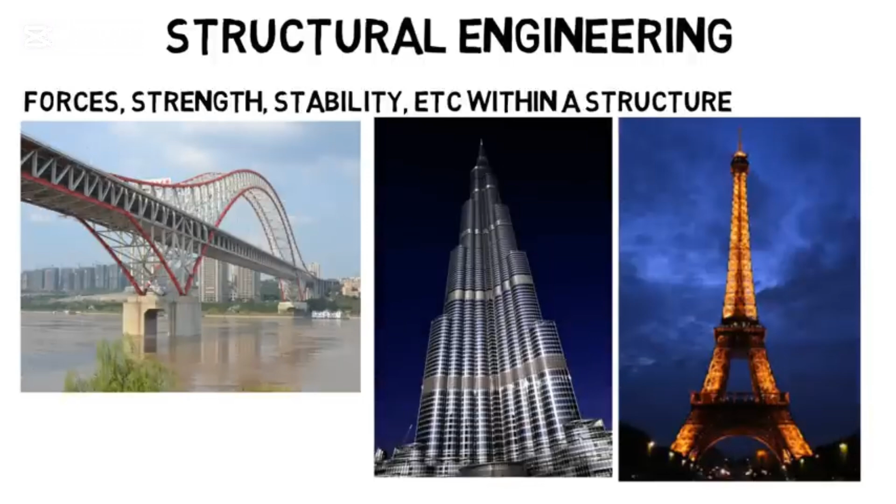So first, structural engineering is about calculating and understanding the forces, strength, stability, and so on within a structure. It could be a bridge, a skyscraper, a landmark, or even a spacecraft or aircraft. Remember, these structures are very heavy and need to support their own weight so that they don't collapse. Now this subfield is the most math intensive and has lots of physics.

All civil engineers will take a class called statics, which is all about the forces and systems that are not moving. In basic physics, you may have done a statics problem, like where does this support have to be for the system to be totally balanced and therefore not moving. You summed all the forces which equaled 0 and all the torques which equaled 0. And that's the basics of statics.

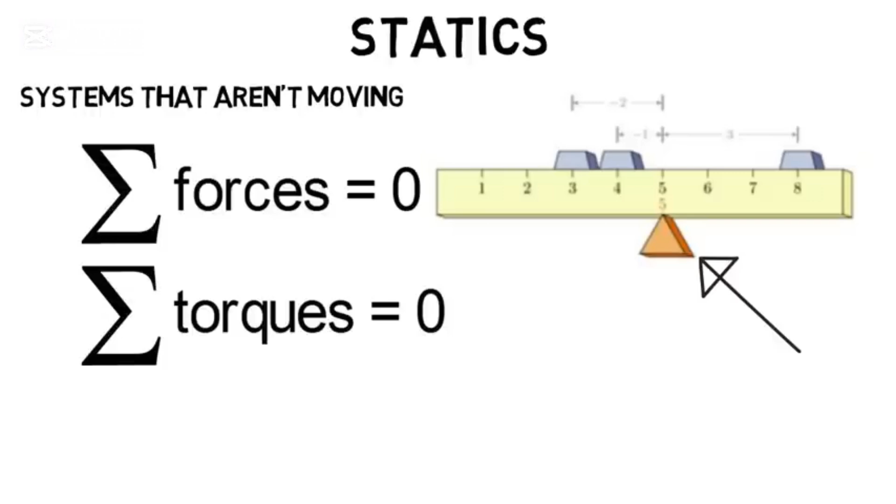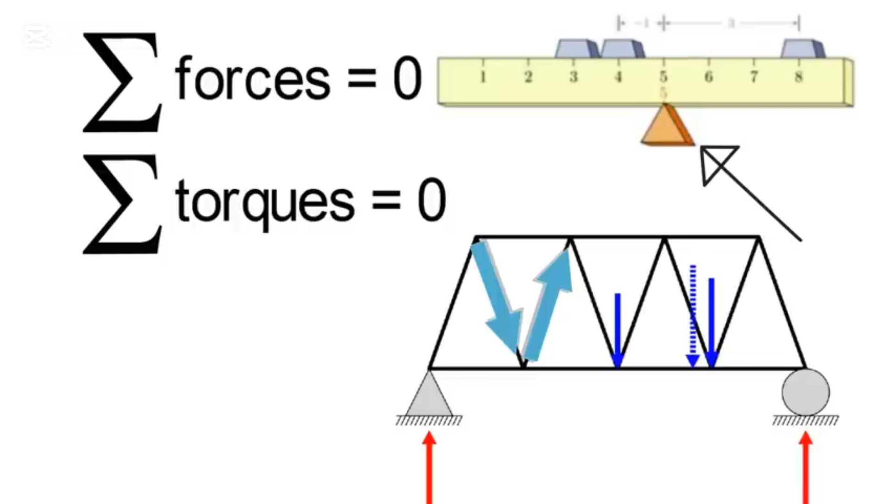So if you're looking at the forces within a bridge or truss, well, the same principles apply, but now there's just more to it. The weight is straight down as shown in blue, all the beams exert forces on one another, but the sum of them is equal to 0, and the torque sums to 0 as well, because the bridge is not moving. And it's of course even more complicated than this, but if you enjoy that kind of basic physics you see above, then you'll likely enjoy the statics and physics you see in structural engineering. So that's just a very simplified explanation, but now let's dive into some of the classes they would take.

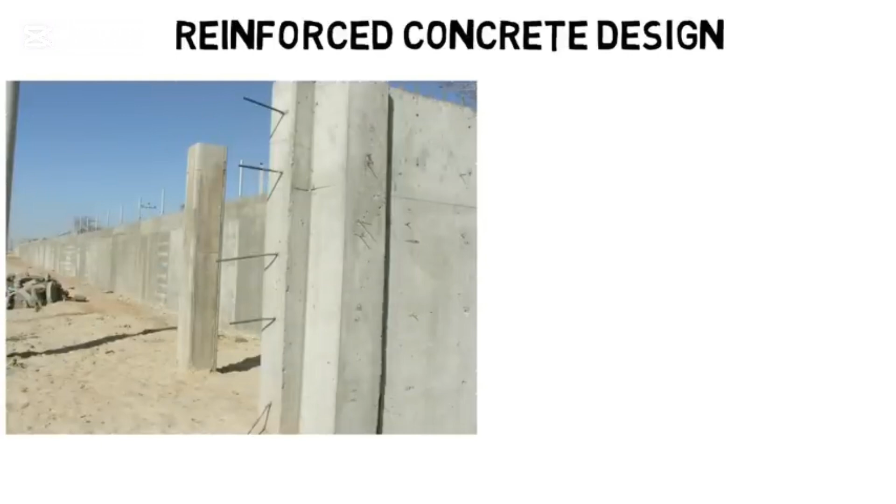One class that would be important for structural students is a reinforced concrete class. In concrete structures, they reinforce it by putting steel beams in the concrete. We can't see those beams, but here, before construction is done, you can see them sticking out. Or you can see a lot of them on these unfinished columns. So why do they do this? Why isn't concrete good enough?

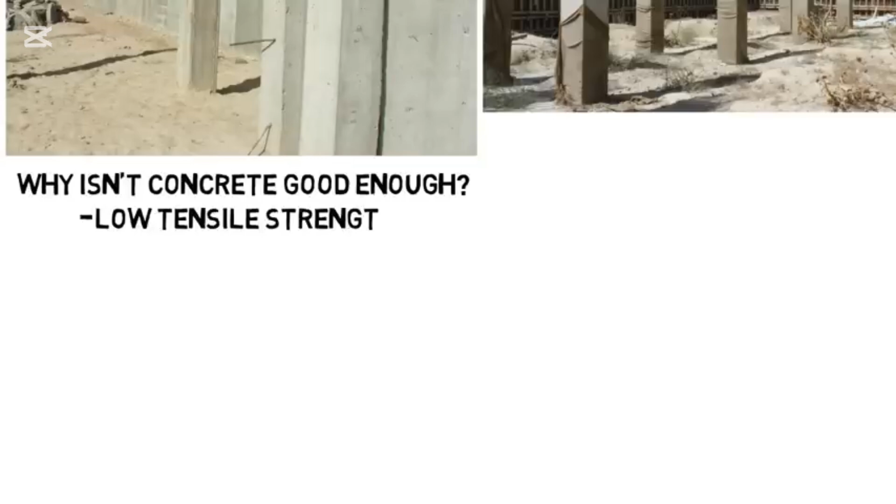Well, concrete alone, once hardened, has low tensile strength, as in it does not handle being pulled very well. However, it's okay with being compressed. But to counteract that low tensile strength, they add steel beams and pour wet concrete, which hardens around them, and then those steel beams have high tensile strength to counteract those types of forces on the structure.

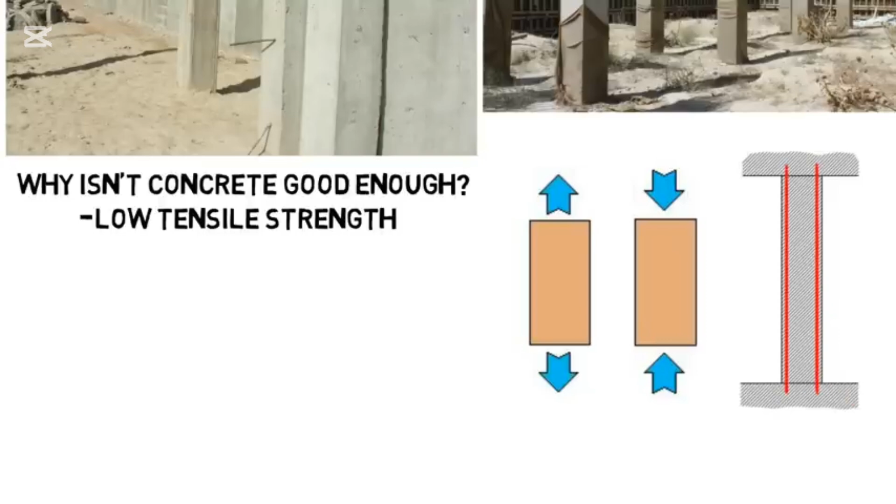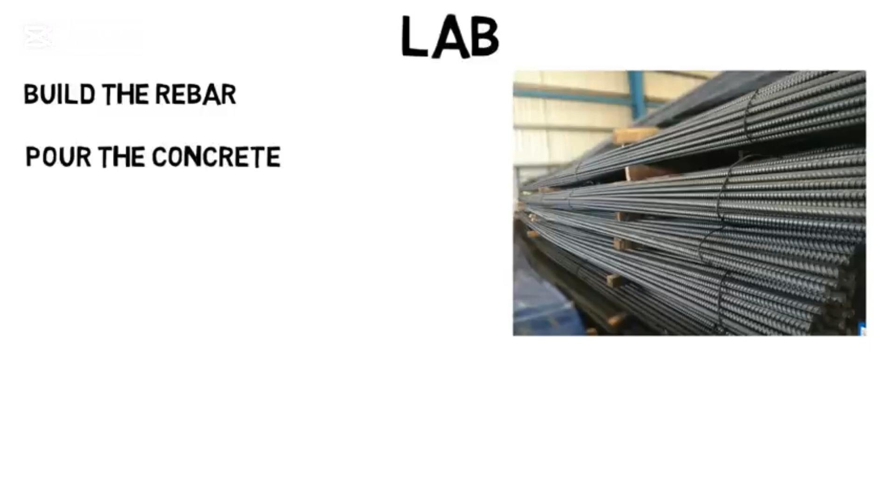So in a lab for this class, you might build the rebar, or the steel reinforcing rods, pour the wet concrete onto them, then once it dries, use a machine that holds the beam on both sides, then apply forces in the middle and keep increasing the force until the beam breaks or cracks and starts falling apart. That force being applied is sent to a computer that tells us the loading on the beam so we can collect the data and get the properties that we need.

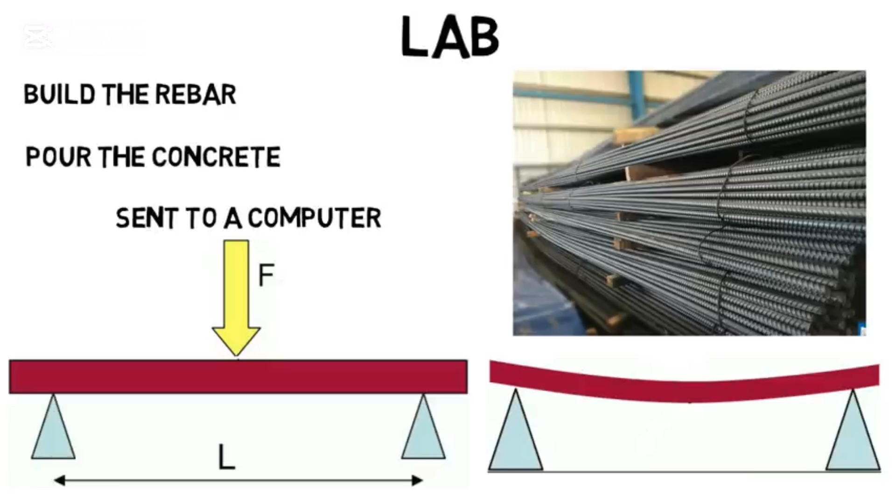You could take structural dynamics as an elective class. Dynamics is about moving systems, unlike statics. So this is one of the few classes where motion is included. So whether it's wind or an earthquake that shakes a building, you need to know how that motion will impact the structure itself and all the forces within it. I've shown this animation before, but mostly for mechanical engineers as it's a vibrating system that they can analyze, but civil engineers can get into this as well. They have to make sure their designs can stand up against any type of movement the structure may be subject to.

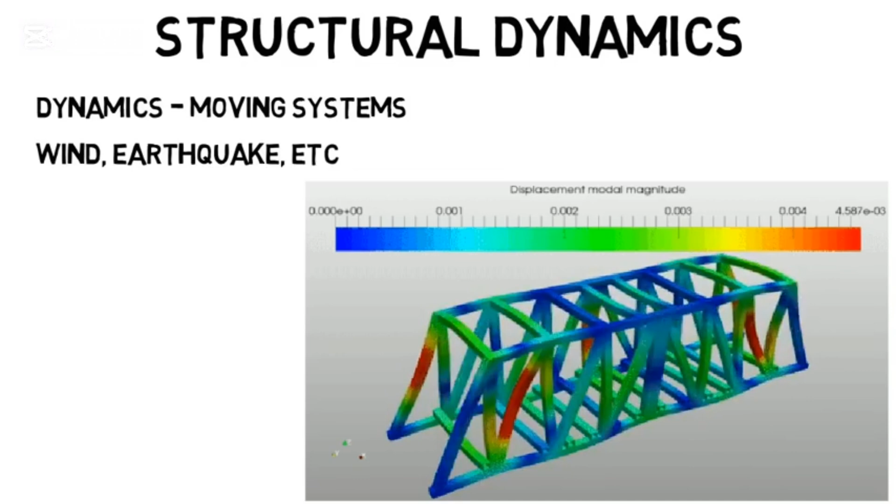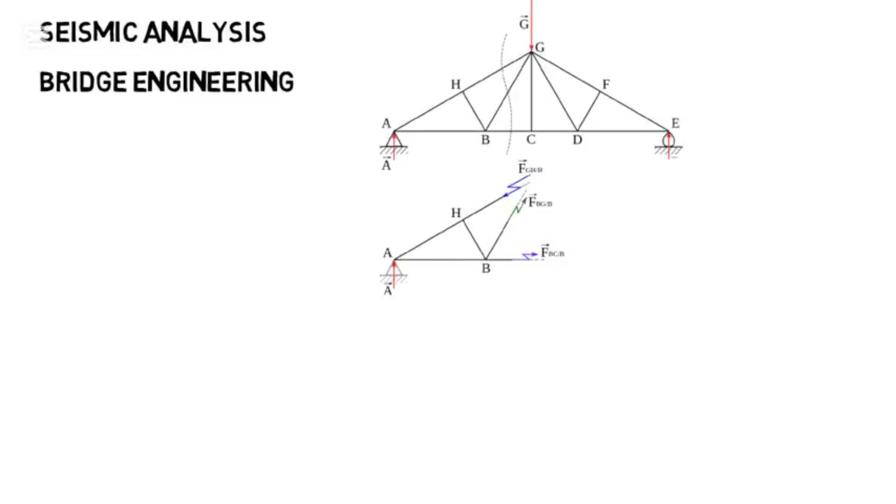You could take an elective class on seismic analysis, which is specifically about calculating the responses of a structure to an earthquake. Or one on bridge engineering, which would be a class on highway bridges, materials used, distribution of loads, and how forces are spread throughout the structure, and so on. Mechanics of materials, like how twisting and bending a beam or column causes it to become internally stressed. Timber structure design, which is about analyzing properties and forces within wooden structures, and much more.

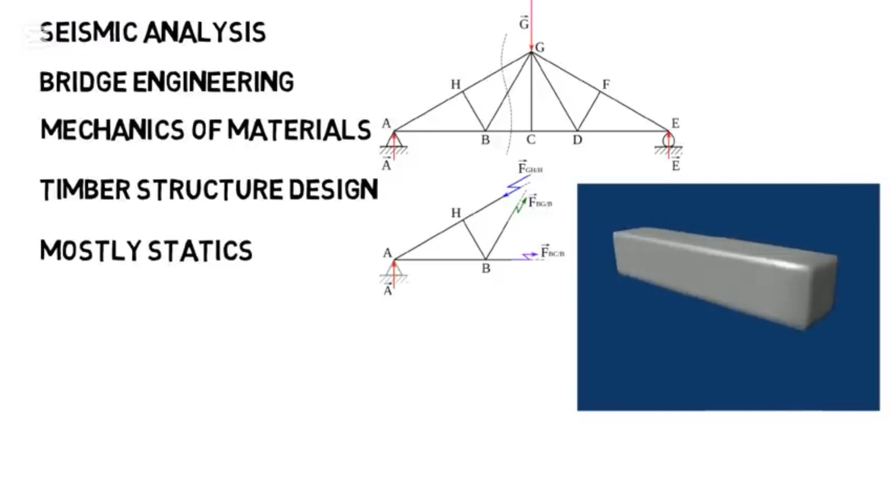See how even if you choose structural engineering, you could still take many different classes from the other structure students? It's a very broad major, but hopefully you really get the idea by now. Lots of physics in this discipline, but mostly statics or forces in structures without movement. In the real world, these engineers often work on the computer and use software for their designs, where that software does that advanced math to determine the forces throughout the structure, like you see here with an office block and its components.

You may still have to do hand calculations, but most of the rigorous analysis you learned in school will be left to the software.

Now let's move on to geotechnical engineering, and you'll already see how different these disciplines are. Geotechnical engineers are concerned with the behavior of earth materials like rock and soil, but the main focus is soil. This may seem odd, but you'll see how important this is.

The structural engineer can do everything right to make sure the building will stand up, but if the geotechnical engineer messes up and you put a structure on soil that can't withstand it or is uneven, the building could fall, sink into the ground, or even lean to one side, probably the most famous being the Leaning Tower of Pisa, which was a result of soil issues.

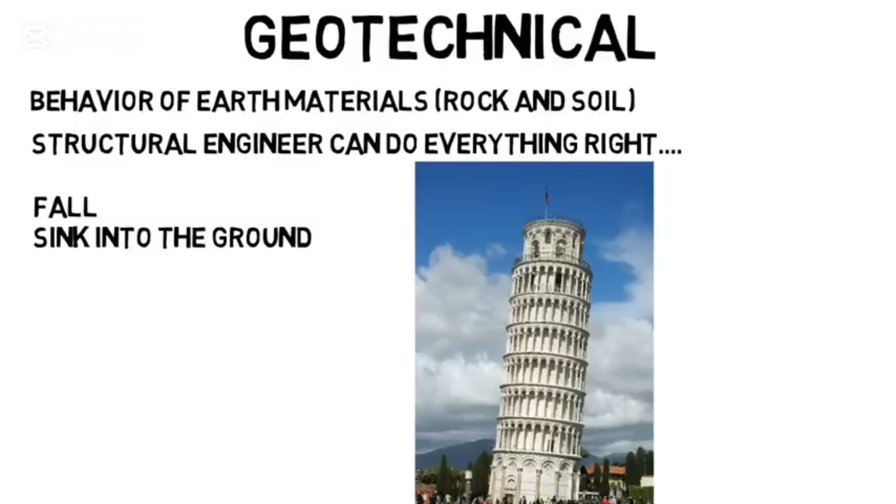Then they also have to consider the foundation of the structures that are being designed, like should they have a shallow foundation or a deep foundation. You may not realize it, but our houses and all the buildings you see have foundations that go underneath the earth to keep the structure as stable as possible by transferring the weight from the structure to the earth.

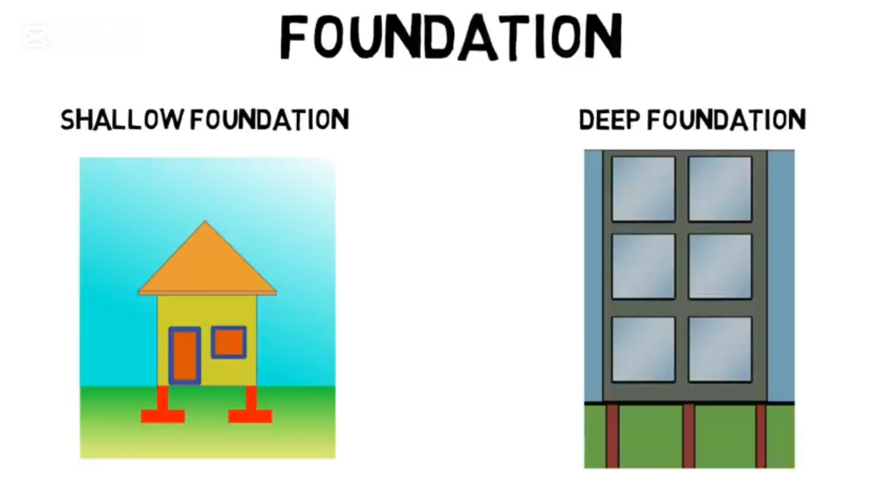But geotechnical engineers rely heavily on testing. So a lab you might see in college is to go out as a class and collect soil samples around your university and bring them to lab. You would have to classify it, like is it sand, gravel, clay, etc. There are many soil types, and you may have to look at the grain size or how it reacts to water.

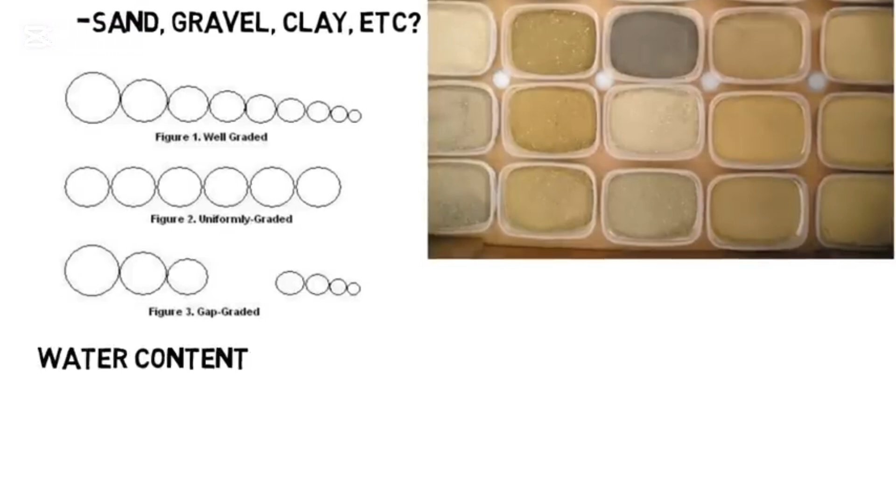You determine its water content by analyzing the sample, which will be comprised of solid soil, water, and air of different masses and volumes. But most importantly, you'll measure how the soil will react to mechanical loading or to different forces acting on it. So you might perform a triaxial test, for example.

Too complicated to explain for this video, but essentially you put the soil in an enclosed area and apply a force or load to the top, which pushes down on the soil. Then pressure sensors measure the pressure at different points to see how the soil is being affected.

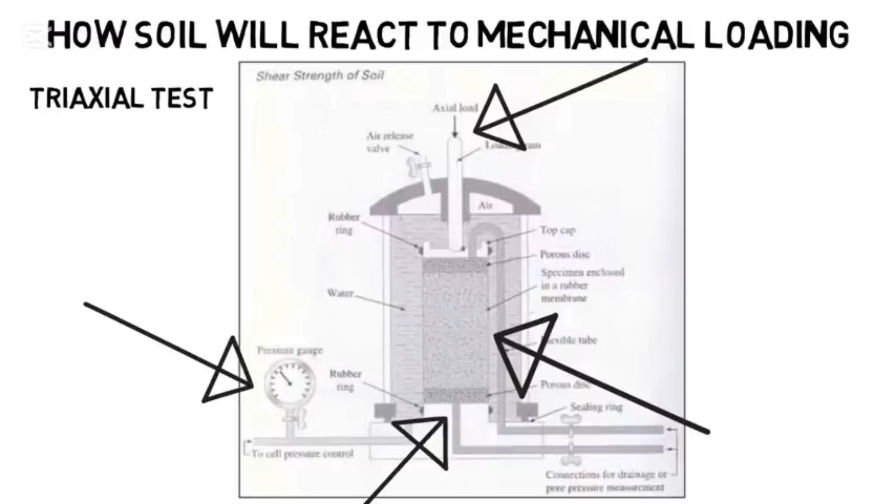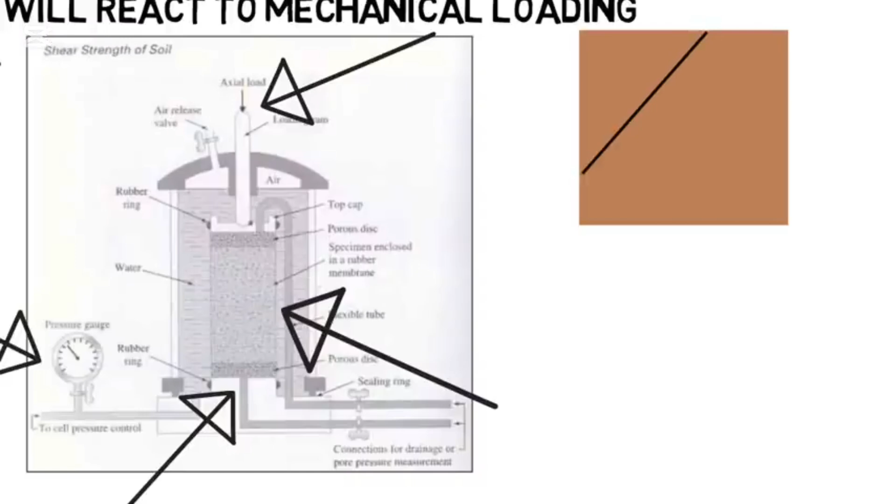If you imagine a square sample of soil and you add a force to the top, the soil can fail along some weak plane. Basically, the weight overpowers the friction holding the soil particles together, and the soil will start to slide, which is known as shear failure. Its ability to stand up to this is known as shear strength, which is one thing that the triaxial test on the left tests for.

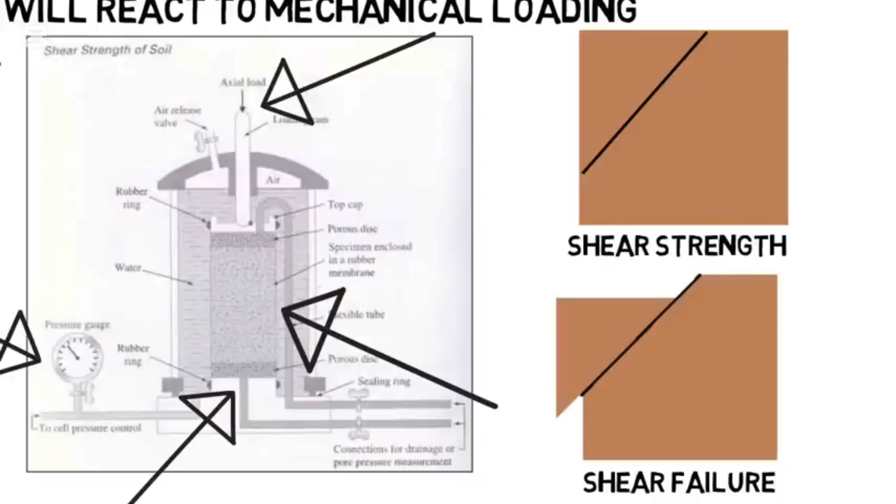And this leads us to what a career in geotechnical engineering could be like. You might be the person who goes out to the field where a structure is going to be built and collects soil samples all around the area for testing. Or you could do testing at the field.

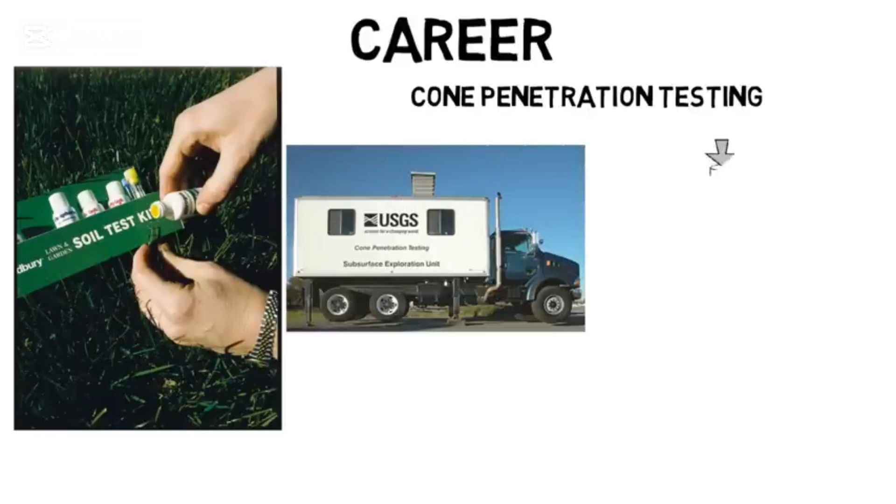One of the most used tests right now in this field is cone penetration testing, where a large truck goes out to the field which has all this equipment on it, and a cone is pushed into the soil, and the pressure will be monitored by a computer on the truck as it moves through the soil into the earth. Based on the pressure, you can analyze the soil mechanical properties.

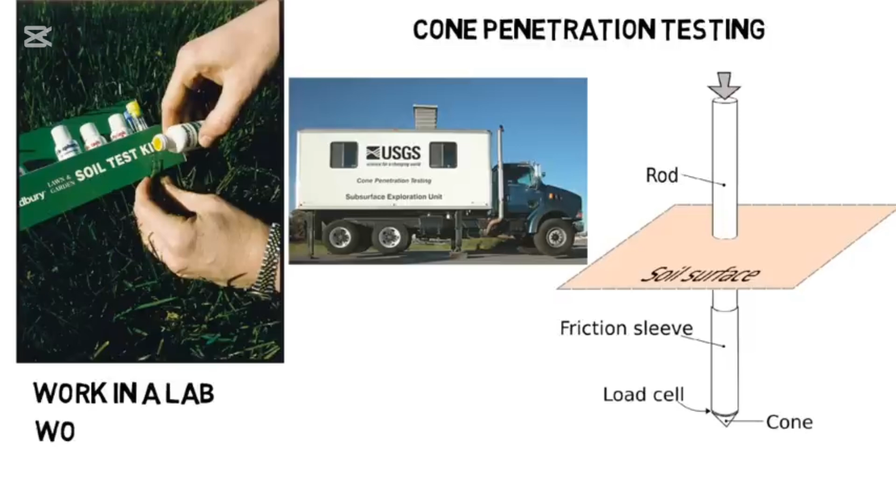Or maybe you could work in a lab where you would do the testing on the soil after it's been collected, like I showed with the triaxial test. Or maybe you could work on the computer and input the different types of soil from the various locations at the site, so you can digitally lay out the area that the structure will rest on. So you could be in the field, in the lab, or on the computer.

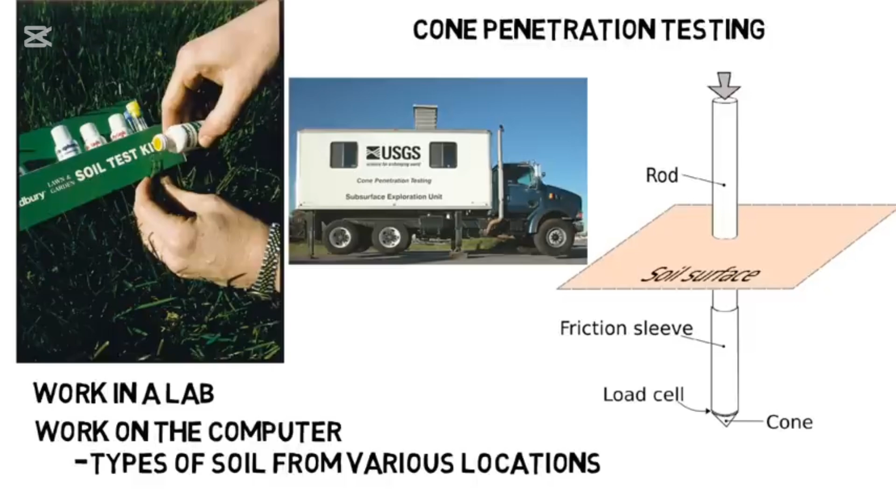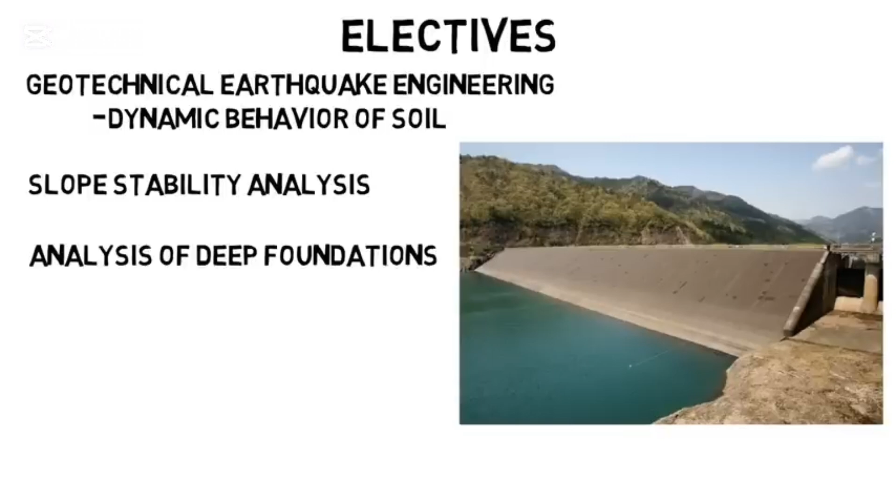Your elective classes could include geotechnical earthquake engineering, which would be like learning the dynamic behavior of soil as opposed to the structure itself. Then slope stability analysis and how to safely design structures on slopes. An example would be an embankment dam. Analysis of deep foundations, where the structure goes deep into the earth for a stronger support, like for skyscrapers. And of course, there are many more classes.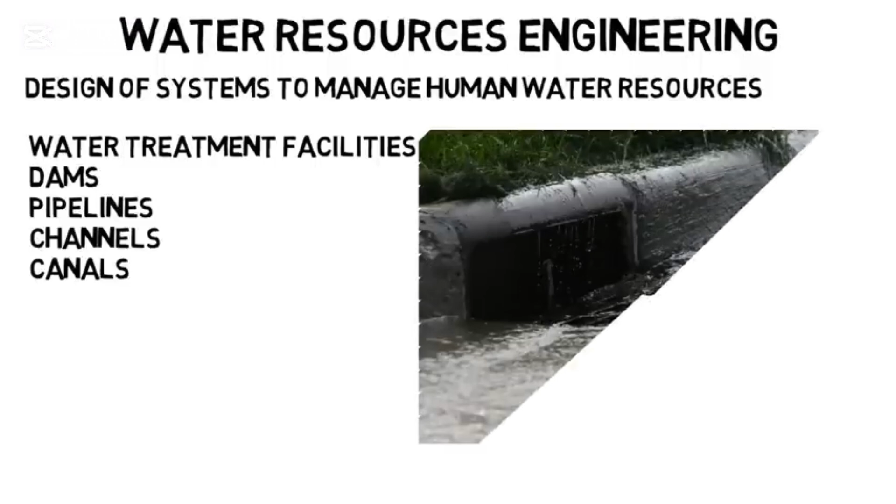Now let's move on to water resources engineering. This is about the design of systems to manage human water resources. They can work on a water treatment facility, designing dams, pipelines, channels, canals, and so on. Maybe you have to design a storm drain system in the event of a large storm. Where is all the water going to go, and how will you get it to the ocean efficiently?

Or you could design a canal, which is an artificial waterway to transport water for irrigation, or can be used for ships and boats. Or you could design a culvert that will allow water to flow under a road or trail or some other obstruction.

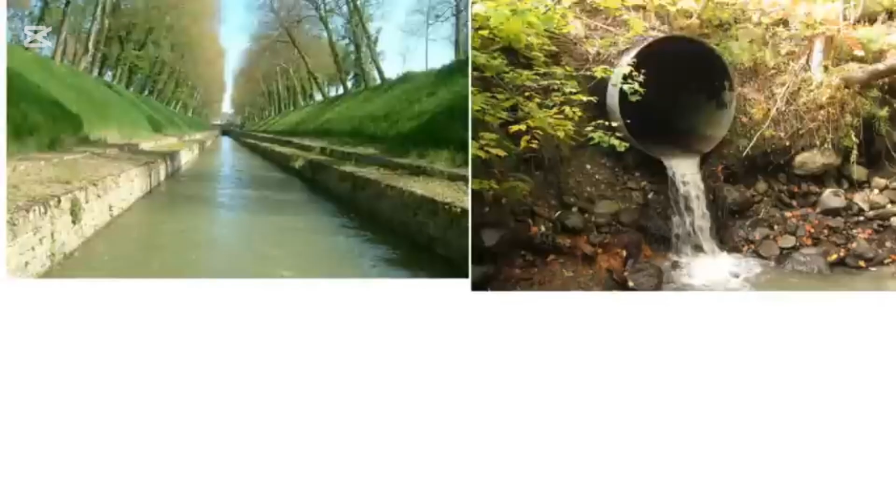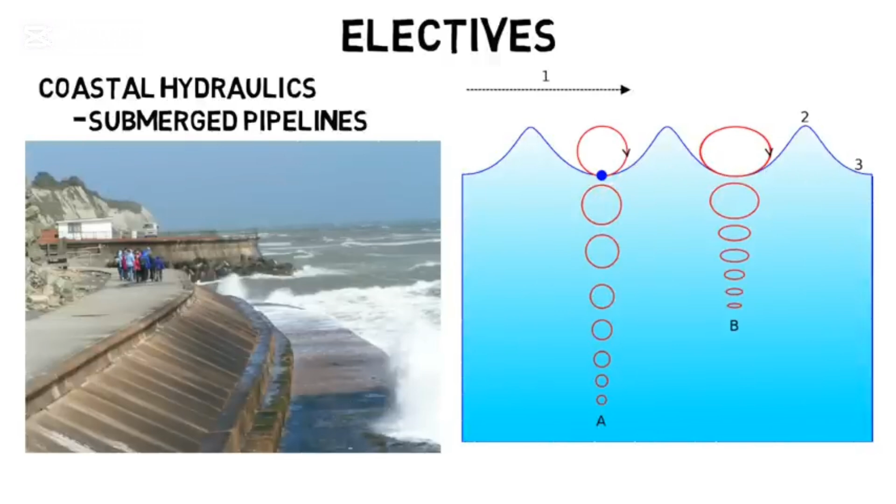Elective classes you could take include coastal hydraulics, where you learn about ocean wave propagation, submerged pipelines, seawalls to protect human habitation, and so on. Or open channel hydraulics, which is about fluid flow in an open channel as opposed to a closed channel or pipeline.

And last is transportation engineering. This is about safe and efficient movement of goods and people. These are the engineers who design streets, roads, highways, railroads, public transportation systems, and even airports.

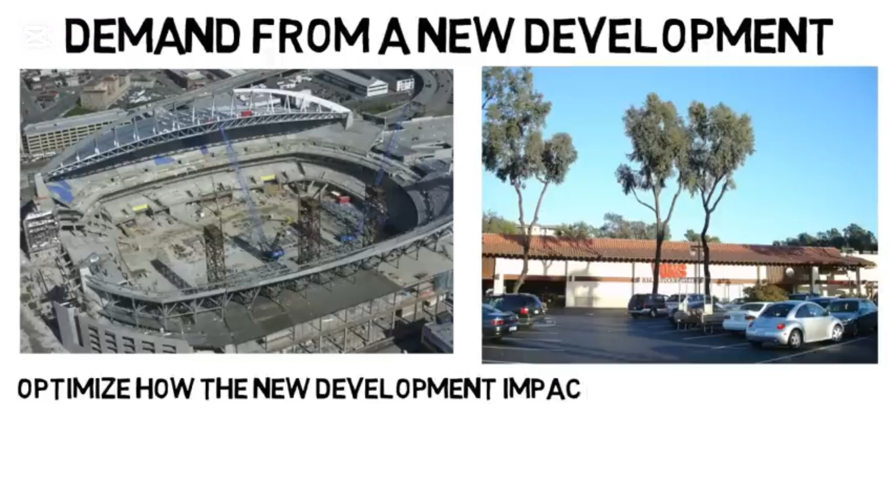So maybe this engineer has to look at the kind of demand from a new development, whether it's a new stadium in your city, all the way to a new grocery store in a new location. This is going to cause new types of traffic throughout the area. The engineers would try to optimize how the new development impacts existing traffic. They would look at data from other similar places to see what kind of traffic they get, then try to make improvements where possible.

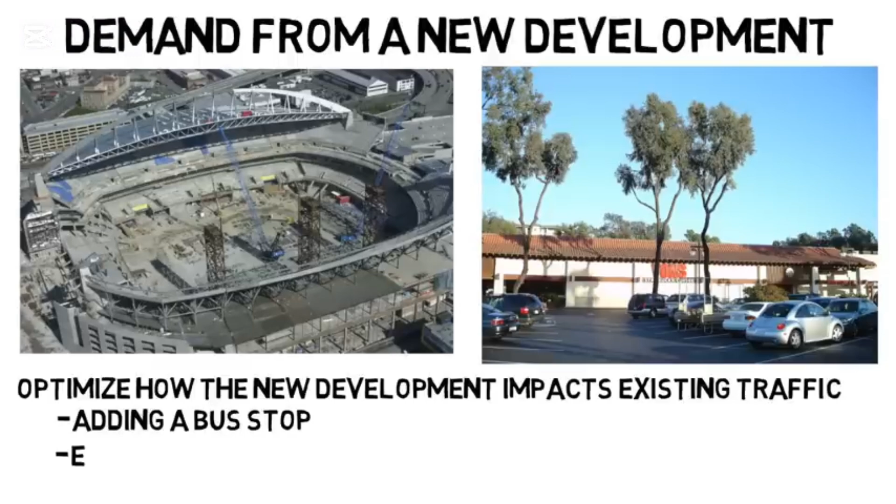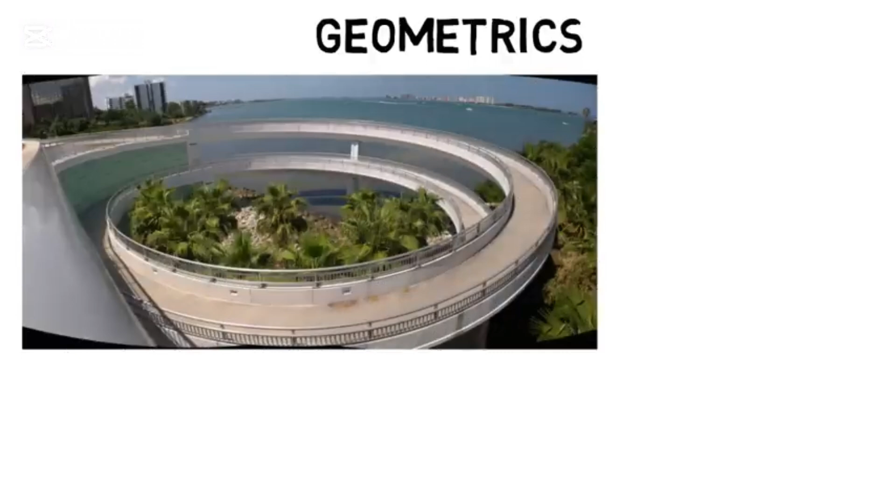It could be simple like adding a bus stop in the nearby area, all the way to expanding the roadway to allow for more traffic. They could work on the geometrics of the roadway, such as what radius of curvature does an off-ramp have to be for a car going 55 miles per hour so the tires won't slip. Or if they're going up an incline, the driver needs to see far enough ahead of them to stop if there's a sudden obstacle. Or what do the cross sections of a freeway need to be for the lanes and the shoulders to accommodate the amount of traffic that's expected?

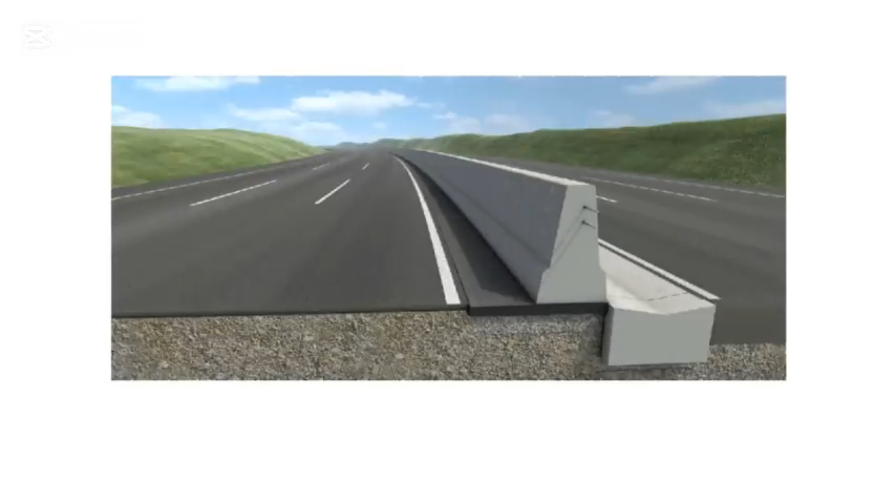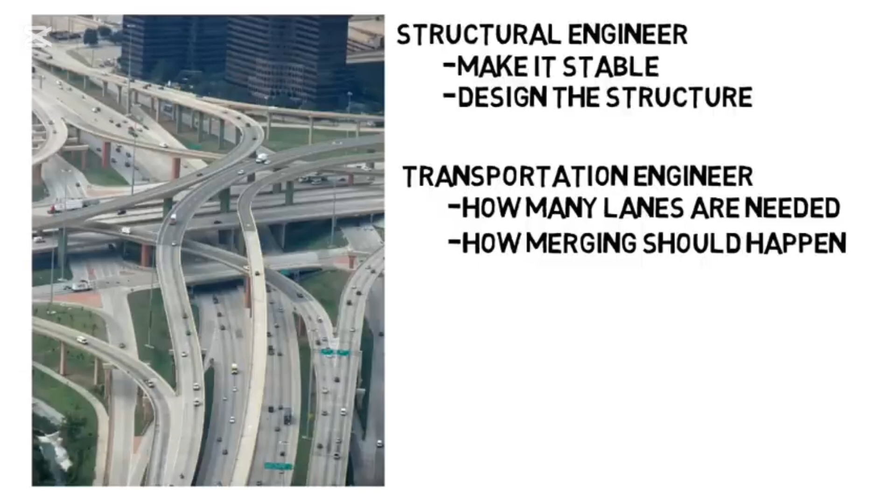Or let's say a highway interchange is being designed. A structural engineer would make it stable and design the structure itself, but the transportation engineer would determine maybe how many lanes are needed for the interchange based on traffic, or how the merging should happen to maximize safety. They make sure that the layout is designed to maximize traffic flow and safety rather than the physics of the structure itself.

Often these engineers evaluate potential improvements to cities in terms of transportation rather than create a totally new design. As in, you probably haven't had many new highways put into your city in the last few years, but there's probably been plenty of construction, whether it be adding an express lane or a bike lane, etc. So they might not create a new bus transportation system, but they may optimize the existing one. Maybe they take data from how many people get on the bus, how long the bus takes to complete its route, how long people are waiting for the bus, and so on to optimize the route, the amount of stops, and more.

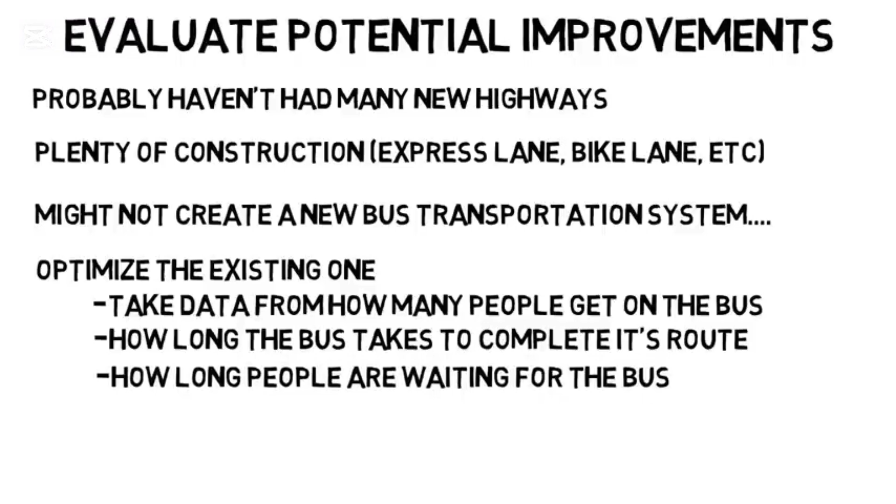Your career will also likely involve a good amount of computer work. You might have to create a layout of the new lane, off-ramp, bridge, or whatever you're designing on AutoCAD, which is a very important software for civil engineers. Or you could use software to analyze and simulate traffic. You could actually lay out the roadway of a city and use collected data of traffic during different times of the day and simulate new additions. Like you could add in a stoplight somewhere and see what the new traffic would be like. Or you can make a minor change, like make a certain stoplight stay green for just a few seconds longer and see how it affects traffic on those streets.

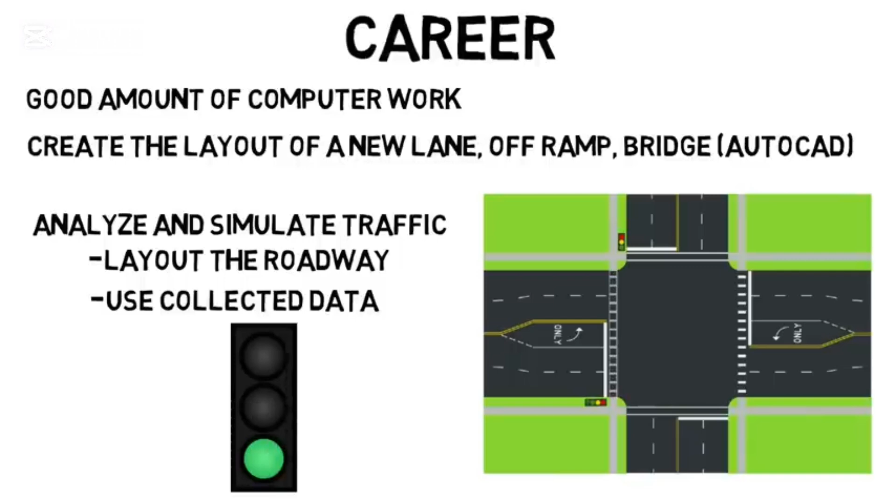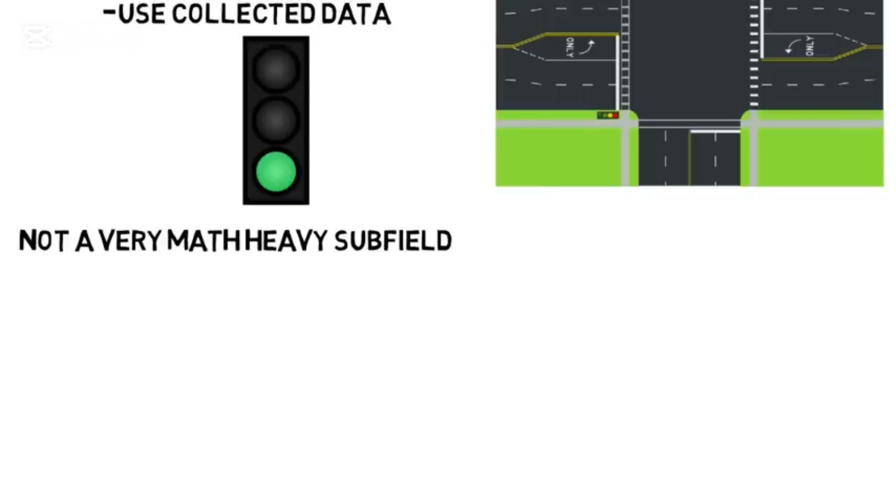And just note, this is not a very math-heavy field. In fact, it's probably the least math-intensive of the 4 subdisciplines I've talked about. It's more about taking data and analyzing it. Even when I talked about the radius of curvature and how fast someone should be going, you won't use the coefficient of friction and do circular motion physics or anything like that. You use even simpler equations to get what you need.

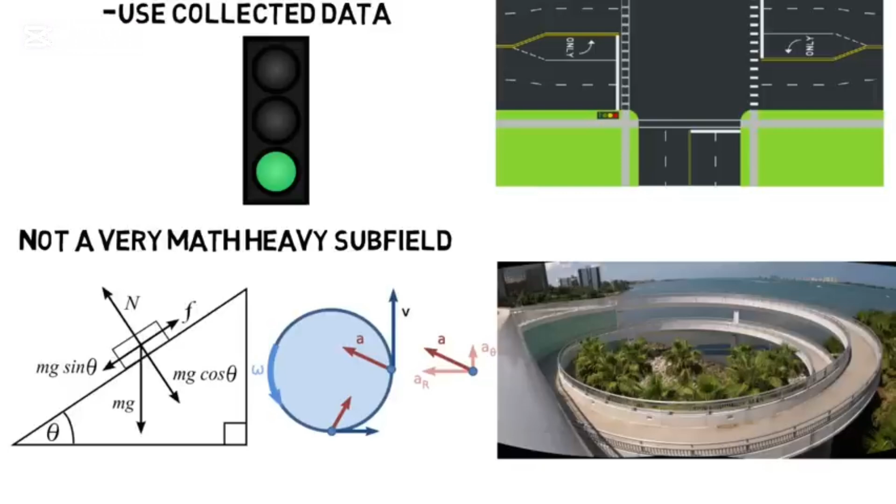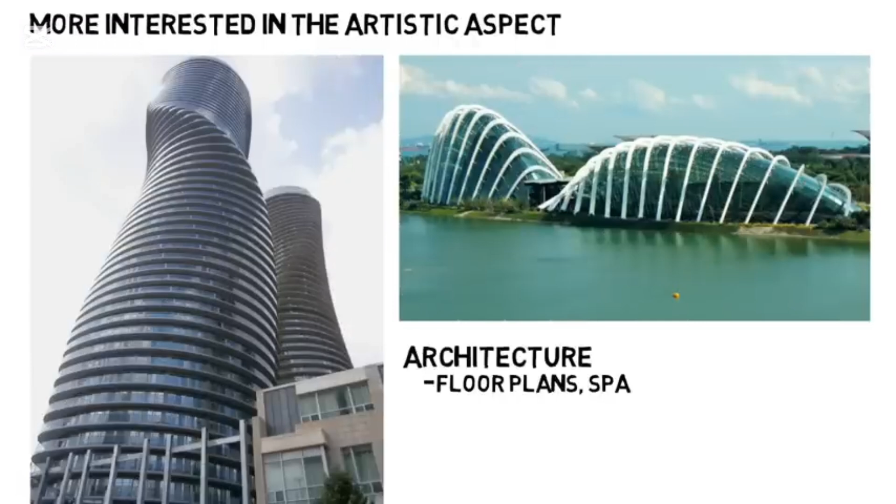Now that's all the main subdisciplines of this major, but there are some final thoughts I want to include. If you're watching all this and are more interested in the artistic aspect of building and structure designs, then architecture will be better for you. Architects deal more with the floor plans, spatial concerns, and the shape and design of the buildings. They have to have an understanding of structures and physics, but not quite as much as a structural engineer. They would hand off their design to the structural engineer, who would really make sure the entire structure could support itself, and they would deal with more of the technical work.

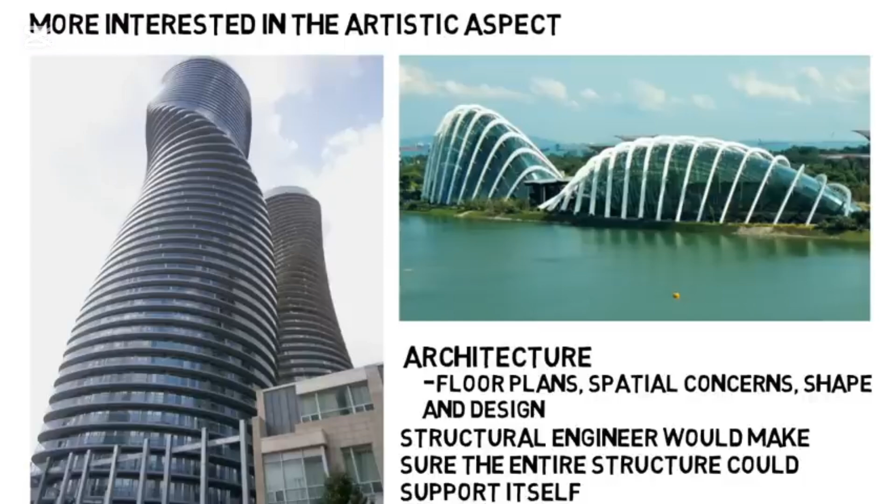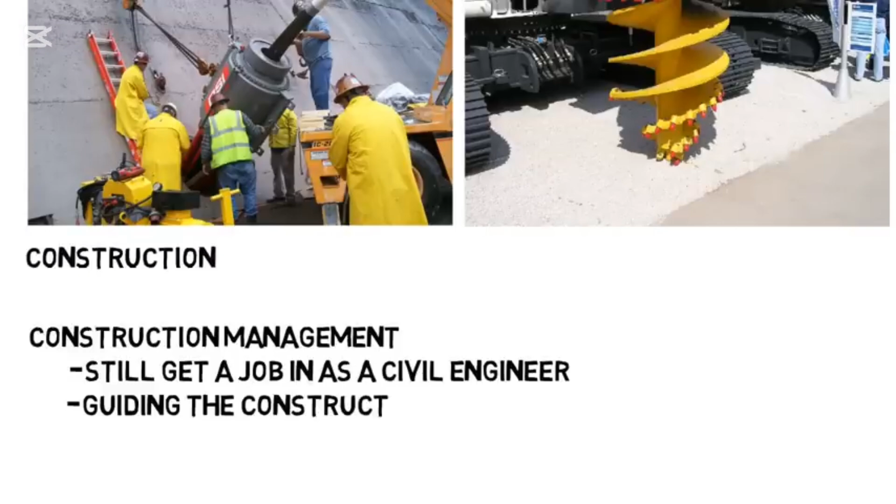Then, if you want to be the one who puts on the hard hat and does all the hands-on work with the machines and physically builds the structures, then construction will be better for you. But then there's also construction management, which you can still get a job in as a civil engineer. Construction companies will hire civil engineers because of their technical background. Construction is the hands-on part, but construction management is more about guiding the construction, putting together schedules, budgeting, and figuring out how all the pieces will come together.